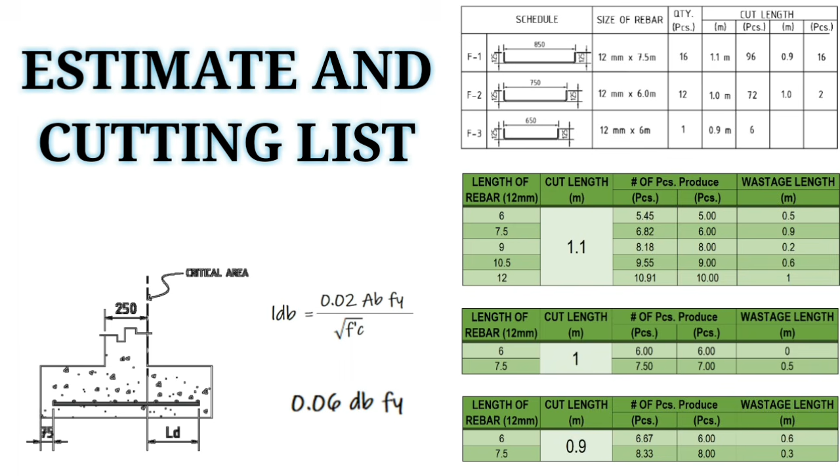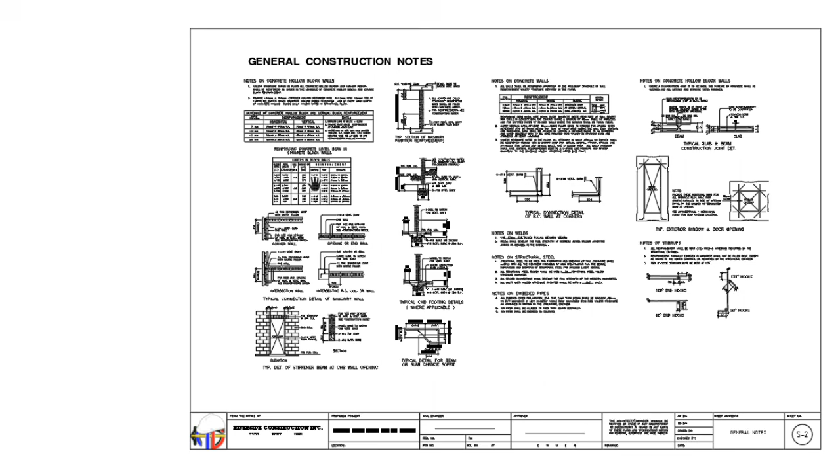Rebar estimate and cutting list is a complicated part of estimate, lalo na kapag hindi natin kabisado yung mga detail and specs about anchorage, lap splice, hooks, development length, and many more. But sa tulong ng general notes na makikita sa first page ng structural plan, napapadali na lamang ito na hindi kailangan kabisaduhin lahat ng laman ng NSCP or ng ACI. Ang kailangan lang natin gawin ay basahin muna yung mga nakalagay sa general notes before starting estimate. Or, if you have time, pwede niya rin balikan yung nauna nating video about development length, seismic hook, and anchorage.

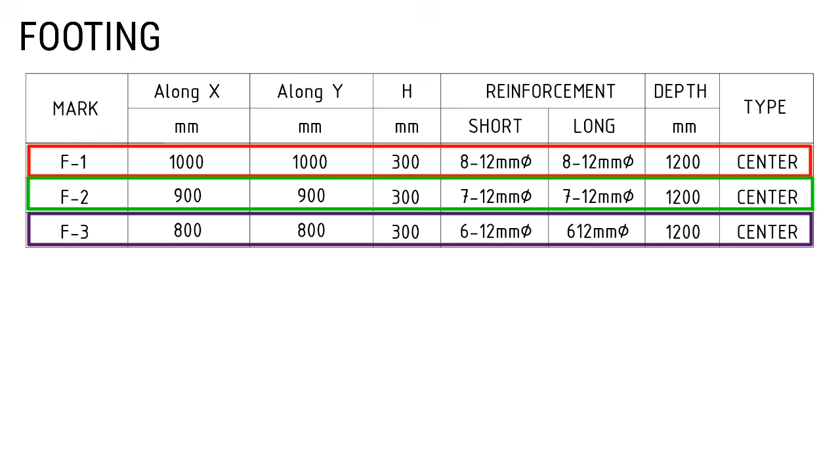Okay, mag-umpisa tayo sa footing. Meron tayong dito yung schedule ng footing. Sabi dito sa schedule, ang F1 ay may 8 pieces na 12 mm in diameter both ways. F2, 7 pieces na 12 mm in diameter. At yung F3, meron daw itong laman na 6 pieces na 12 mm in diameter both ways. Base dito sa plano, meron tayong 6 sets of F1, 5 sets of F2, at 2 sets of F3.

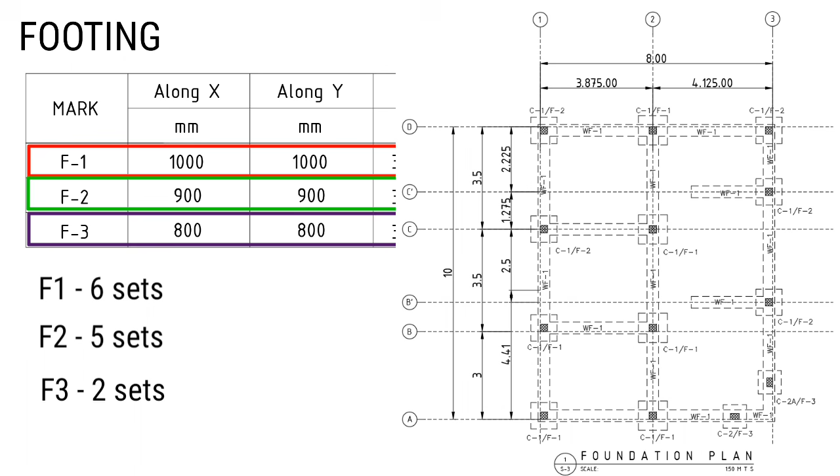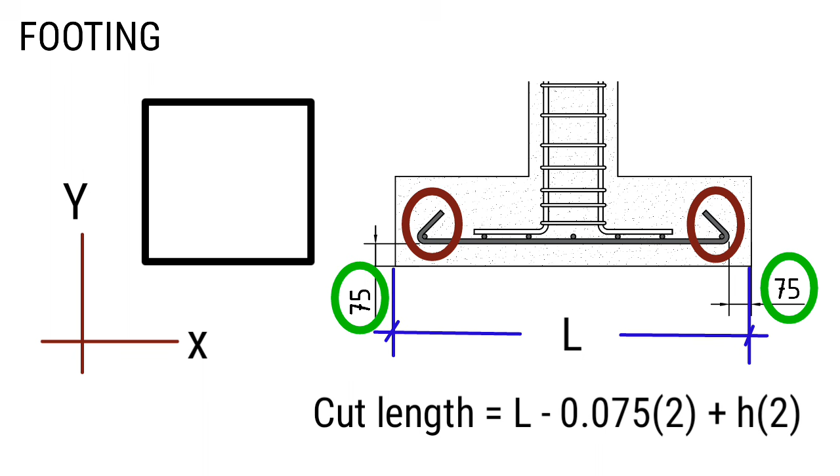After natin malaman yung detail ng ating footing, alamin naman natin yung sukat o haba ng bakal na magagamit natin each footing. Since square ang ating footing, anuman ang makompute natin na haba ng bakal along X, ganun din ang haba along Y direction. Ang haba ng bakal na kailangan natin, that is equal to length ng footing minus concrete cover. So meron tayong 75 mm na concrete cover para sa structure directly contact on ground o sa lupa, plus length of hook. But the question is, kailan ba natin maglagay ng hook?

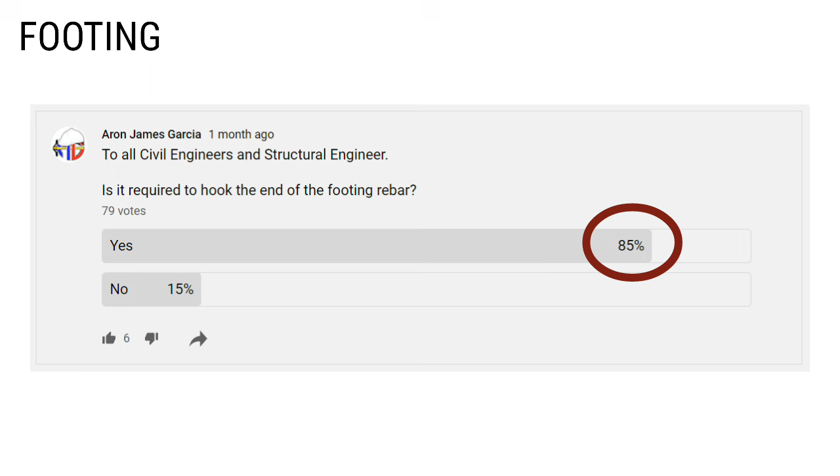Base dito sa ginawa kong pulse survey, majority ang sagot ay kailangan daw maglagay ng hook. So meron ditong sumagot sa ating katanungan. Basahin natin ito. Ito ay sagot ni Sir George na kaisa-isang nagkomento. Shout out pala Sir George. Salamat sa pagsagot ng aming katanungan.

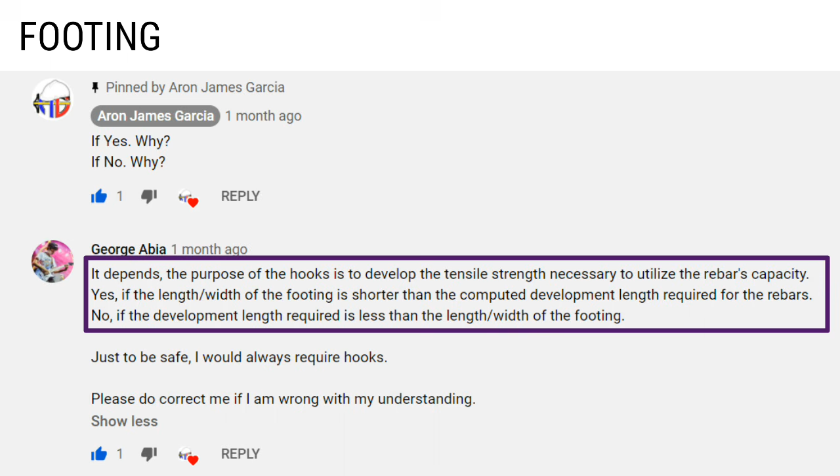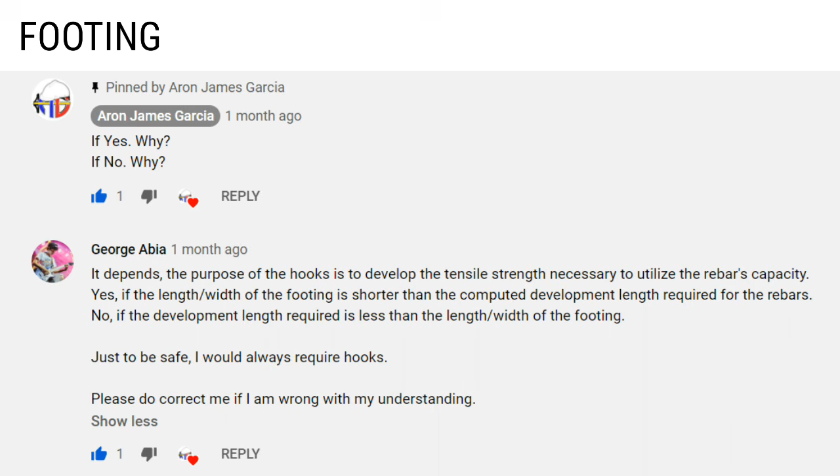Sabi niya dito, it depends. The purpose of hook is to develop the tensile strength necessary to utilize the rebar capacity. At ang sabi niya dito, oo daw, kailangan daw maglagay ng hook if the length or width of the footing is shorter than the computed development length required for the rebars. Hindi daw kailangan maglagay ng hook if the development length required is less than the length or width of the footing. Which is tama. At ang sabi pa niya dito, just to be safe, I would always require hooks.

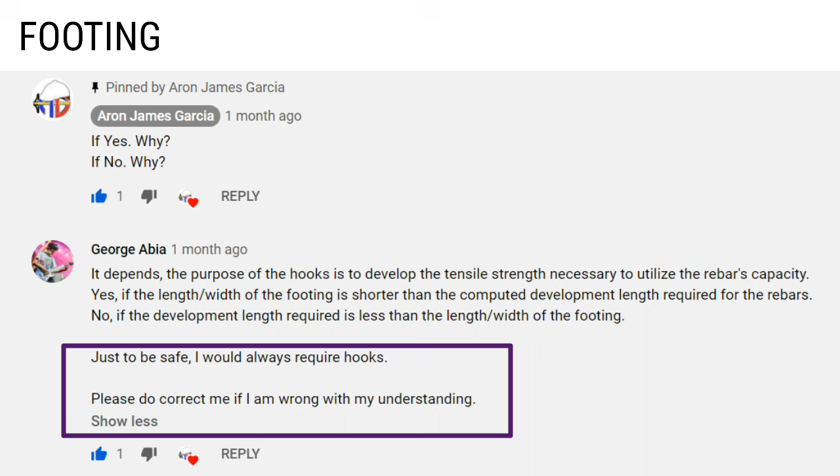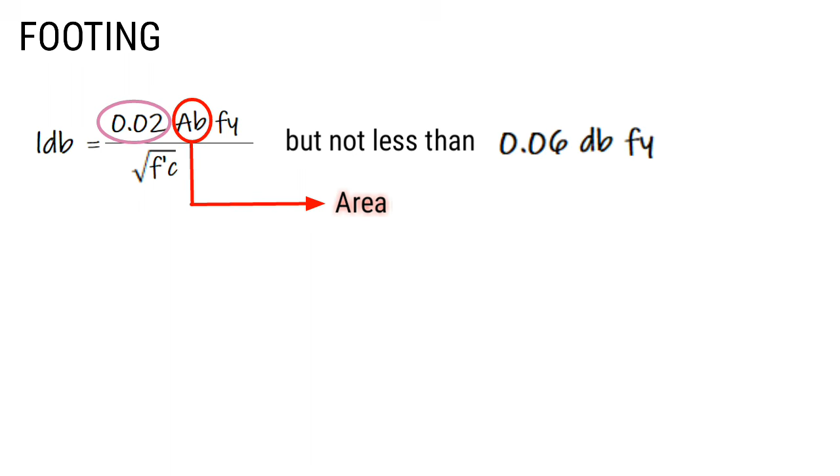So, subukan natin i-translate ito into numbers, itong komento ni Sir George. Ito yung tinutukoy ni Sir George na required development length sa kanyang sagot. Development length, that is equal to 0.02 multiply by the area ng steel na gagamitin, multiply by the bar grade ng ating bakal or yung tinatawag natin na yield strength.

Divided by the square root of FC prime or yung compressive strength ng concrete, but not less than 0.06 multiply by bar diameter multiply by the yield strength ng steel. By the way, gagamit tayo ng grade 40 na bakal para dito sa ating footing, with a yield strength of 275 megapascal. At yung compressive strength naman natin, gagamit tayo ng 3,000 PSI or 20.7 megapascal.

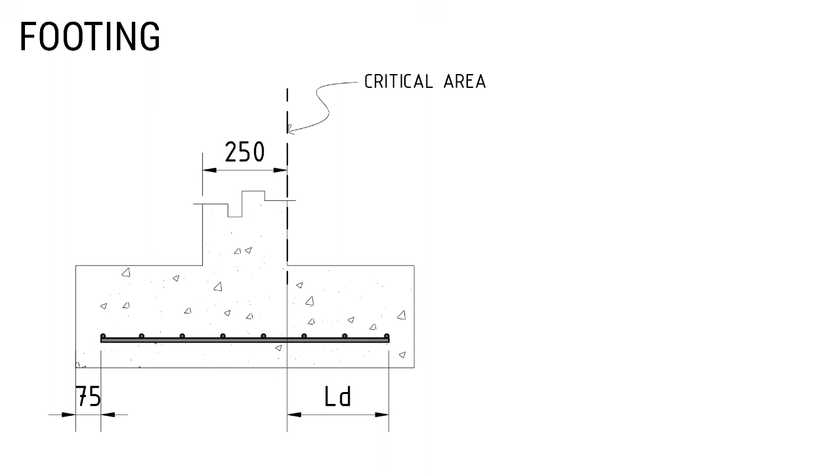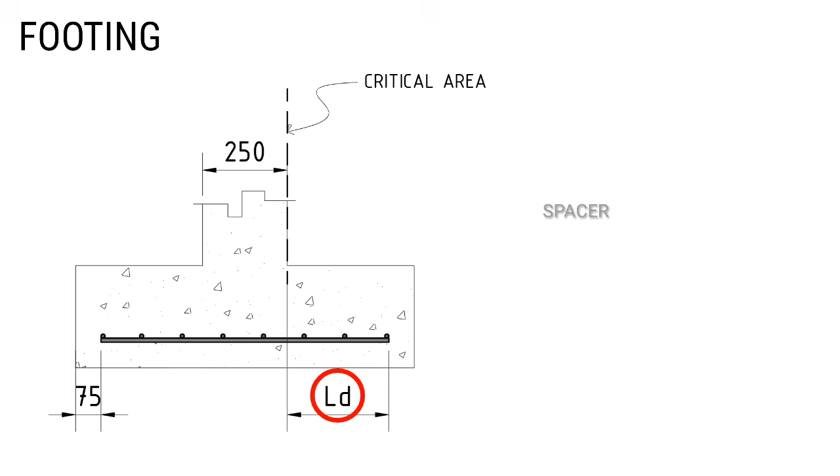So yung length or width of footing na tinutukoy ni Sir George ay ito yun. Ito yung actual development length or furnished development length ng ating footing. Kaya sa mga nakakakita ng footing reinforcement na walang hook, hindi natin pwedeng sabihin na mali yung paglalagay ng bakal without a basis or a data. At sa mga nagsasabi naman na ang purpose ng hook ng footing ay para magsilbing spacer, mali po ito.

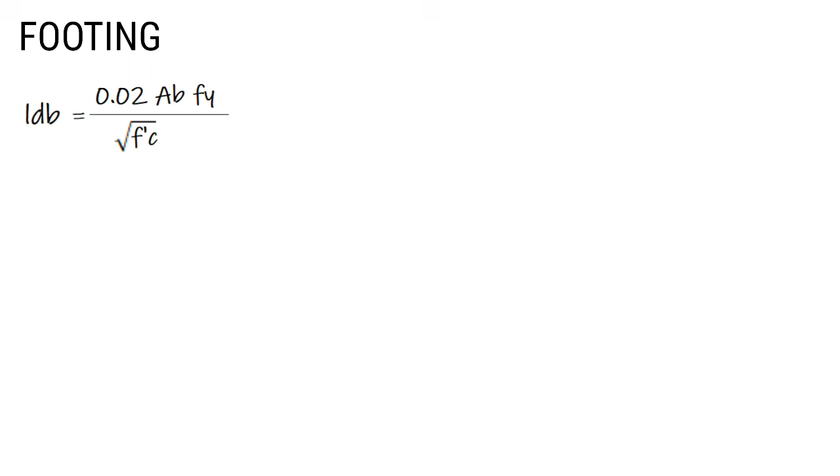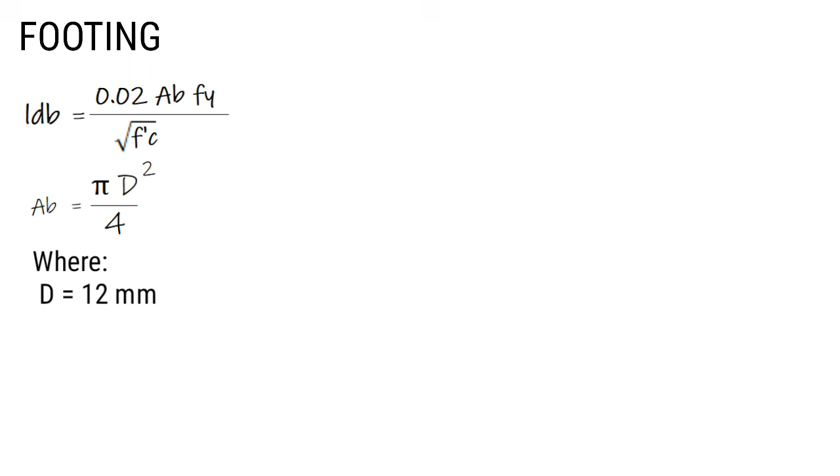Okay, let's find out kung kailangan ba natin maglagay ng hook. So, required development length, that is equal to 0.02 multiply by the area ng steel, which is pi d square divided by 4, where d, that is equal to 12, multiply by the yield strength ng steel, which is 275 megapascal, divided by the square root of FC prime, or 20.7 megapascal.

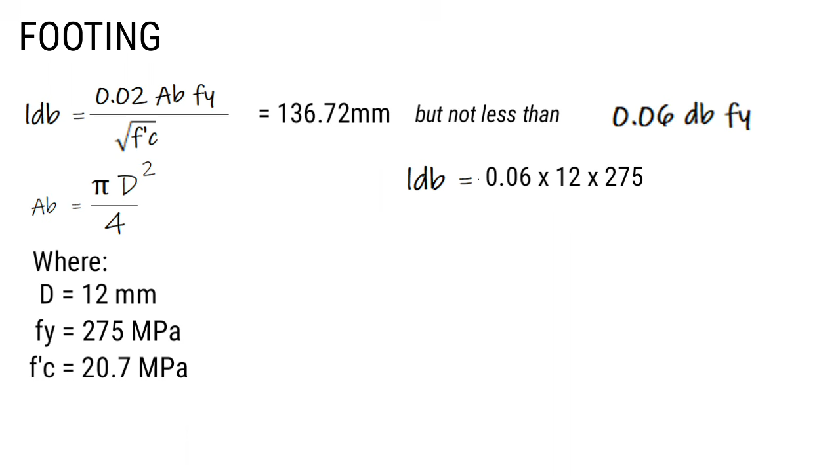So, ang makukuha natin, that is equal to 136.72 millimeters. Pero, dapat hindi daw ito bababa sa 0.06 multiply by the bar diameter multiply by 275 or yung yield strength. So 0.06 multiply by 12 millimeters multiply by 275 na Fy, that is equal to 198 millimeters. So, ang governing value ng ating LD or yung required development length natin ay 198 millimeters.

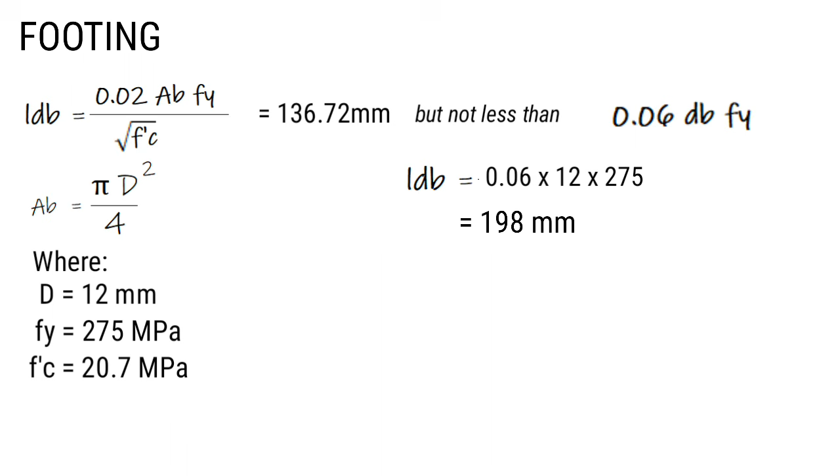Other than 12 millimeters, so meron akong ginawang table dito. From 10 millimeters to 32 millimeters in diameter na bakal. Pwede nyo itong gamitin as long as pareho ng requirement na nasa table. Compressive strength nito ay 20.7 megapascal with corresponding bar grades. Kung mas mataas yung requirement nyo dito, gamitin nyo na lang yung ating formula.

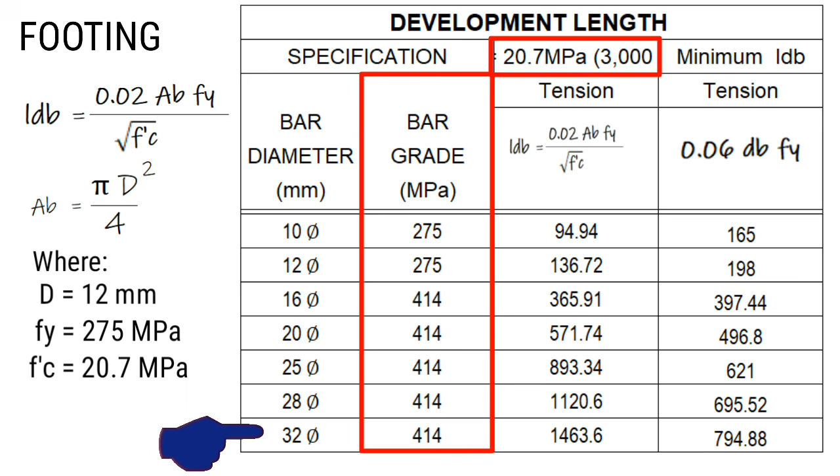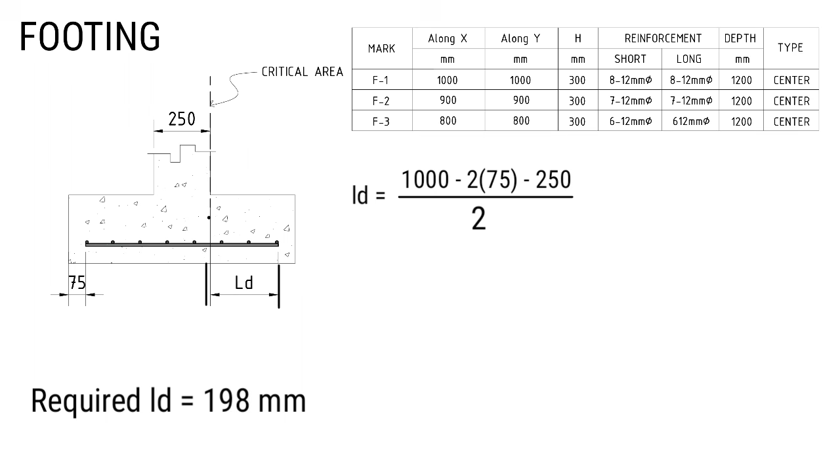Okay, let's compute the furnish LD or furnish development length ng footing 1, footing 2, at footing 3. So let's start with F1 or footing 1. So LD or furnish LD, that is equal to 1,000 or 1 meter na dimension ng ating footing. Ibabawas lang natin yung concrete cover na 75 both side, so minus 75, minus 75. At ibabawas din natin yung sukat ng ating column, which is 250 millimeters, so minus 250 millimeters divided by 2 para makuha natin itong from critical area mula do sa dulo ng ating bakal.

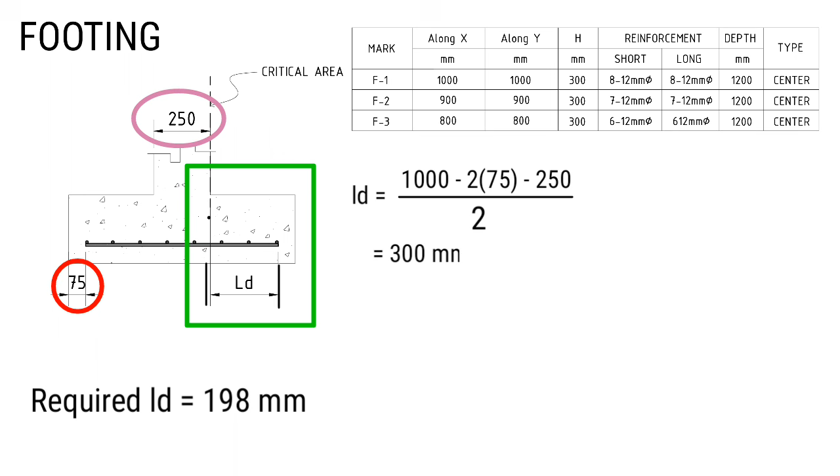That is equal to 300 millimeters. 300 millimeters is greater than the required development length natin na 198. Therefore, hindi natin kailangan maglagay ng hook para sa ating F1.

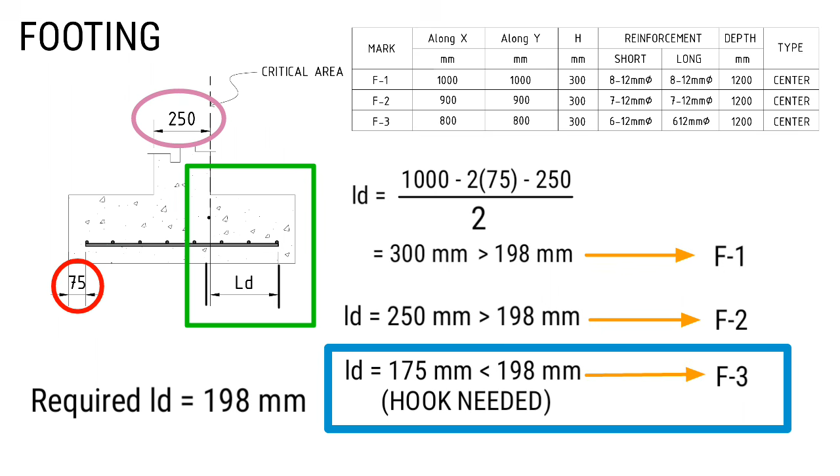Since meron tayong computed na required LD na 198 at meron tayong furnished LD na 175, ibig sabihin kung ano yung kulang doon sa 175 para maging 198, yun ang ibebend natin or yung haba ng hook. So 198, ibabawas lang natin yung 175, that is equal to 23 millimeters.

So 23 millimeters ay napakahirap i-bend dahil sa liit ng moment arm nito. So instead of 23, ang ginawa ko, hinabaan ko na siya, at least 9 db. So yung iba, ginagawa nila 16 db or 16 multiplied by bar diameter. Okay din naman ito as long as mas mahaba ito sa required LD natin. So 9 db or 9 multiplied by 12 na rebar diameter natin, that is equal to 108 millimeters.

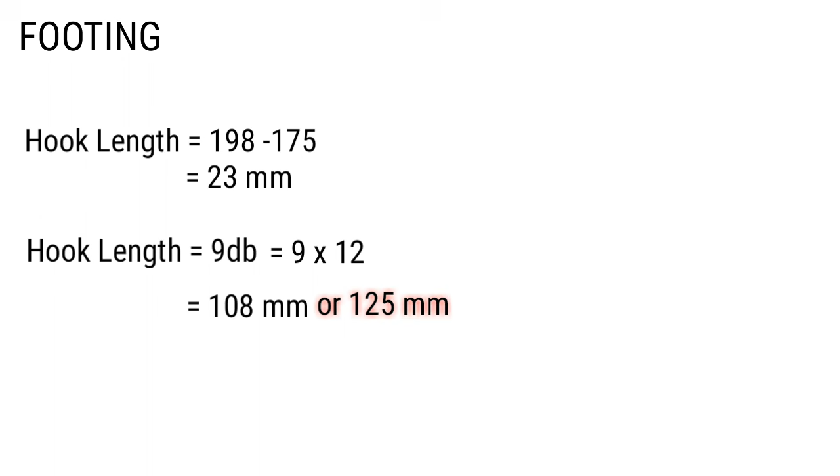Pero dapat divisible by 25 millimeters ang ating sukat para hindi na mahirapan pa yung tao na magsusukat. Kaya gawin natin itong 125 millimeters. Para sa bend nito, pwede nyo i-bend ito into 90 degrees or 135 degrees kung hindi kasya sa height ng footing. Okay, balik tayo sa ating topic na estimate.

So unahin muna natin alamin yung haba ng bakal na kakailanganin natin. Let's start with footing 1. By the way, para maging uniform yung ating rebar reinforcement sa footing 3, so maglalagay na rin tayo ng 125 mm na hook sa F1 and F2 or footing 2.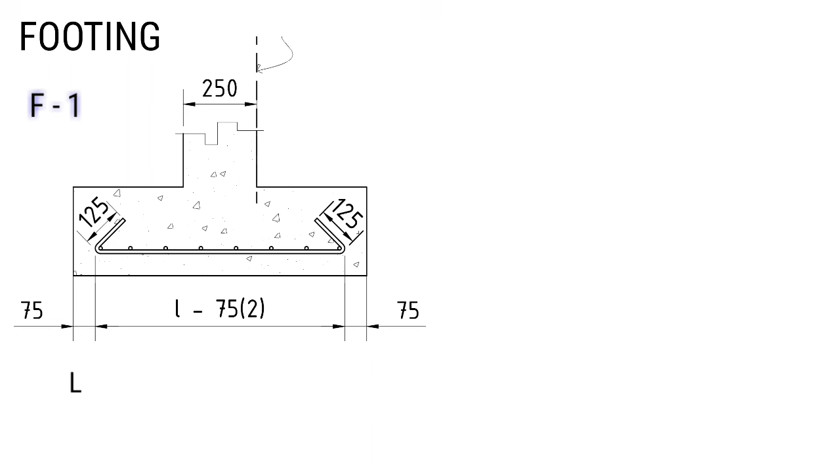So length of rebar, that is equal to 1 meter. Ibabawas lang natin yung concrete cover na 0.075 kabilaan, so multiply by 2, plus yung ating hook. So 0.125 multiplied by 2. And that is equal to 1.1 meter.

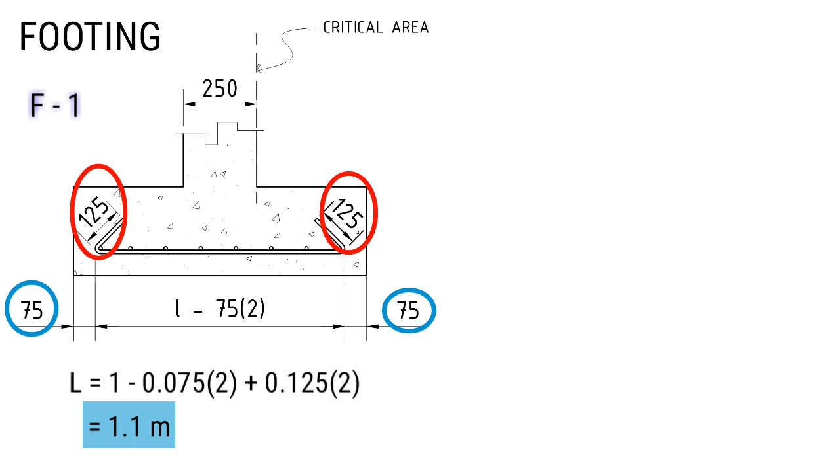So we have 6 sets of footing 1 na kung saan kada isang set nito ay naglalaman ng 8 pieces na 12 mm both ways. So number of pieces, that is equal to 6 sets multiplied by 8 pieces na 12 mm multiplied by 2 dahil both ways ito, that is equal to 96 pieces. So kailangan natin ng 96 pieces na bakal na may habang 1.1 meter.

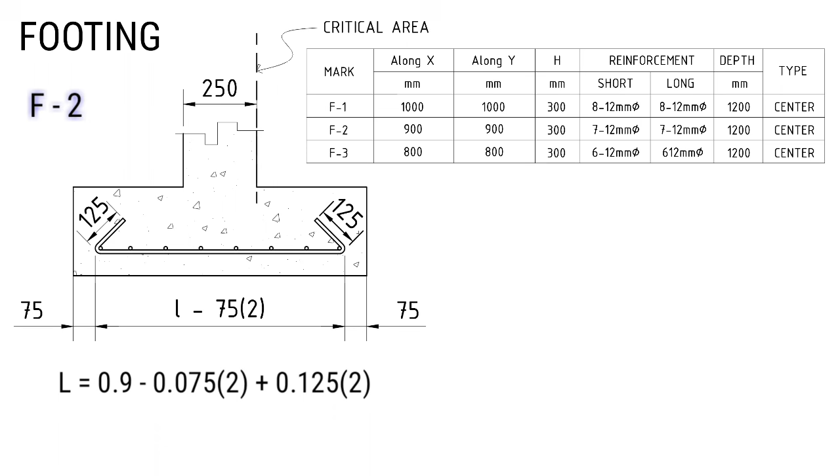Next, footing 2. So length of rebar, that is equal to 0.9 meter. Ibabawas lang natin yung concrete cover, so minus 0.075 multiplied by 2, plus yung hook length natin na 0.125 multiplied by 2. And that is equal to 1 meter.

So we have 5 sets of footing 2 na kung saan kada isang set nito ay may laman na 7 pieces na 12 mm both ways. So number of pieces, that is equal to 5 sets multiplied by 7 pieces na 12 mm diameter na bakal multiplied by 2 dahil kabilaan ito. And that is equal to 70 pieces. So kailangan natin ng 70 pieces na bakal na may habang 1 meter.

Next, footing 3. So length of rebar, that is equal to 0.8 meter minus 0.075 multiplied by 2 na concrete cover natin plus 0.125 multiplied by 2 na hook length, and that is equal to 0.9 meter. So we have two sets of footing 3 na kung saan kada isang set nito ay naglalaman ng 6 pieces na 12 mm in diameter na bakal both ways. So number of pieces, that is equal to 2 multiplied by 6 pieces multiplied by 2 dahil both ways ito, and that is equal to 24 pieces. So kailangan natin ng 24 pieces na bakal na may haba na 0.9 meter.

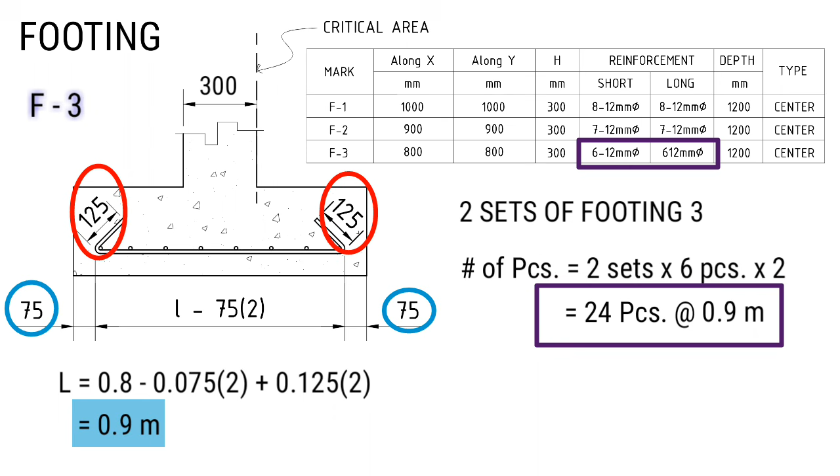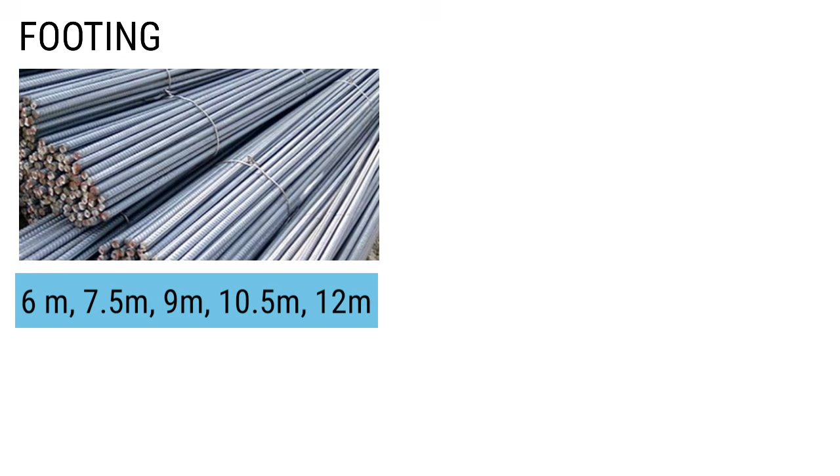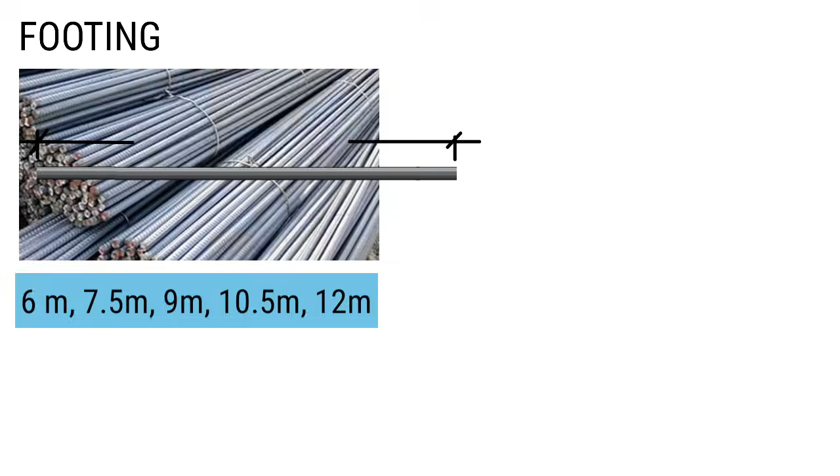Ang tanong, saan natin kukunin or anong haba ng bakal ang puputulin natin para maiwasan natin ang wastage? So dito sa Pilipinas, meron tayong 6 meters, 7.5 meters, 9 meters, up to 12 meters na haba ng bakal. So ang gawin natin, i-divide lang natin ito sa haba ng bakal na kailangan natin. Okay, let's start with footing 1. So umpisa natin sa 6 meters. So 6 divided by 1.1 na haba ng bakal na kailangan natin.

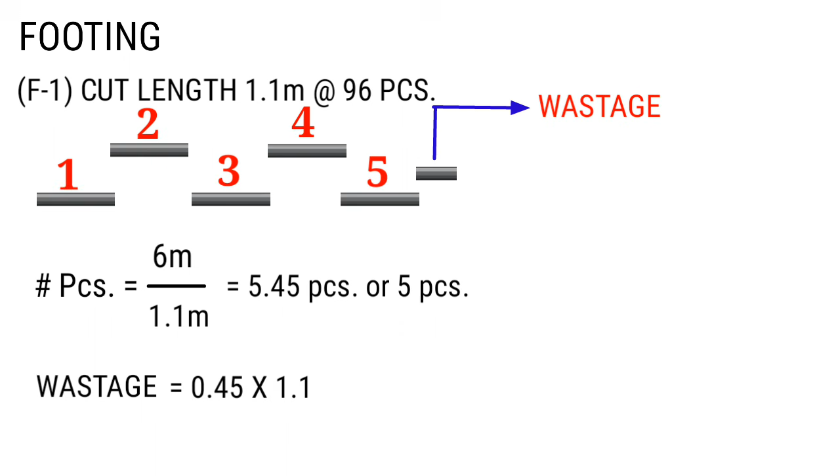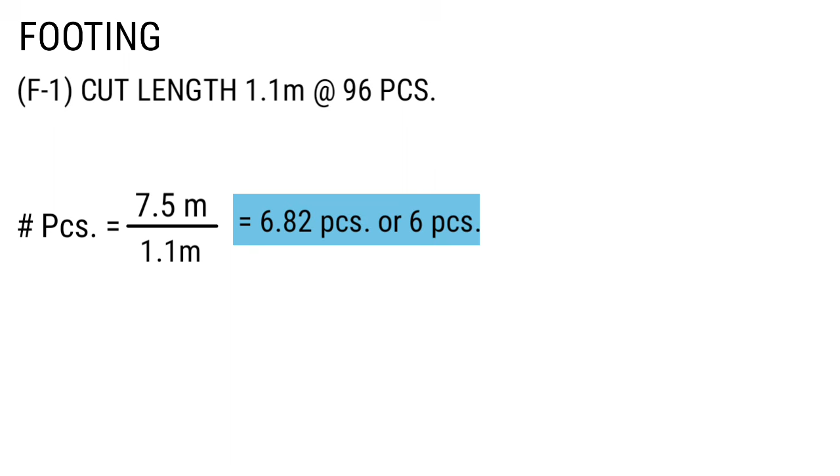That is equal to 5.45 pieces or 5 pieces. So meron tayong wastage o masasayang na bakal na may haba na 0.45 multiplied by 1.1, and that is equal to 0.5 meter. For 7.5 naman, so 7.5 divided by 1.1, and that is equal to 6.82 or 6 pieces. So ang wastage natin dito ay 0.82 multiplied by 1.1, and that is equal to 0.9 meter.

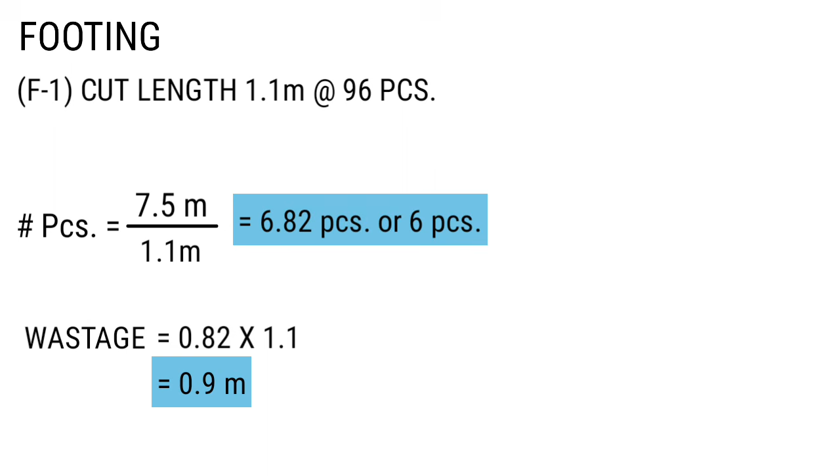So same process din ang gagawin natin sa 9 meter, 10.5 meters at 12 meters. So ito yung summary. Kung mapapansin nyo, ang 9 meters ay may kaunting tapon o mas maiksi ang masasayang na bakal. But considering the 7.5 meters and 12 meters na maaari natin magamit yung wastage nito sa footing 2 at footing 3. So hindi laging mas maiksi ay may kaunting wastage. Pwede rin sa mahaba. Pero kung gumagawa tayo ng estimate for big projects, pwede nyong gamitin yung 9 meters para magkaroon tayo ng factor of safety in case tumaas yung price ng bakal.

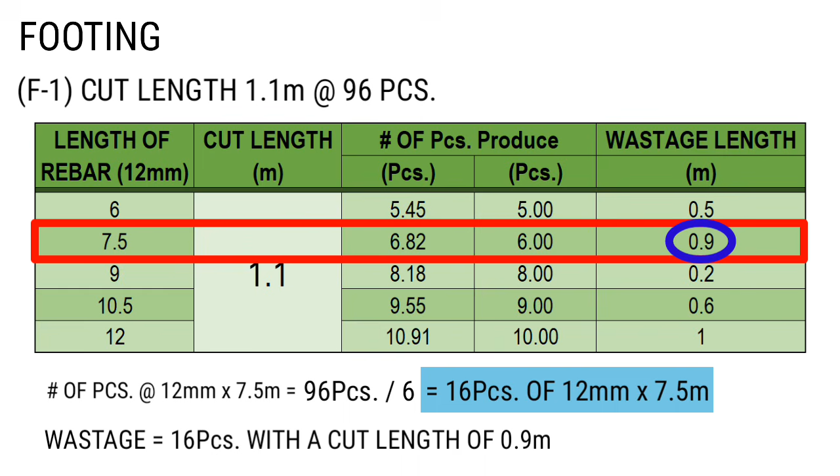Pero dahil ang available lamang na bakal na mabibili sa maliliit na hardware or commercially available ay 6 meters at 7.5 meters. Dahil ang 9 meters to 12 meters ay made to order or pinupurchase ito directly sa manufacturer. So gagamit tayo ng 7.5 meters para sa footing 1. Pero in case wala tayong paggagamitan na 0.9 meter na wastage ng 7.5, 6 meters ang gamitin natin na may kaunting wastage. So number of pieces of 12 mm by 7.5 meters, that is equal to 96 pieces divided by 6. So ang makukuha natin, 16 pieces na 12 mm by 7.5. So meron itong wastage na 16 pieces na 0.9 meter ang haba na pwede natin magamit sa footing 3.

Next, footing 2. So here's the result. So ang best choice natin dito between 6 and 7.5 ay yung 6 meters. So number of pieces at 12 mm by 6 meters, that is equal to 70 pieces divided by 6. And that is equal to 11.66 pieces or 12 pieces na 12 mm by 6 meter. So meron itong wastage na 2 pieces na may habang 1 meter.

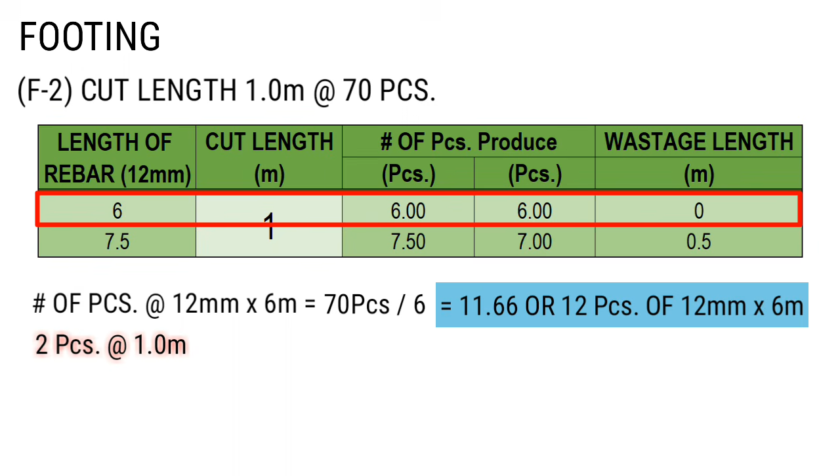So paano nakuha yung 2 pieces na yan? So wastage, that is equal to 1 minus 0.66 multiplied by 6 na ginamit natin na bakal. And that is equal to 2.04 pieces or 2 pieces.

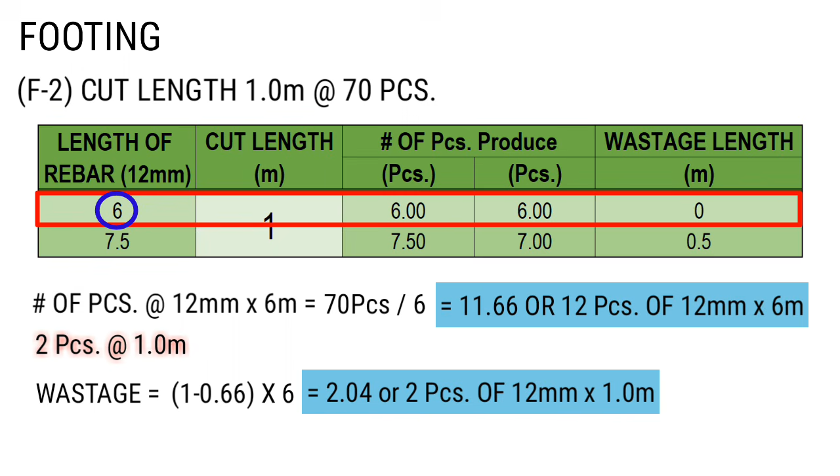So meron tayong total of 24 pieces na 0.9 meter ang haba. Pero dahil meron tayong mga wastage na kasukat ng bakal na kailangan natin para dito, so ibabawas natin ito sa 24 pieces. So remaining, that is equal to 24, ibabawas natin yung 16 pieces na wastage dun sa F1, which is 0.9 meter ang haba. So pasok siya dun sa ating requirement.

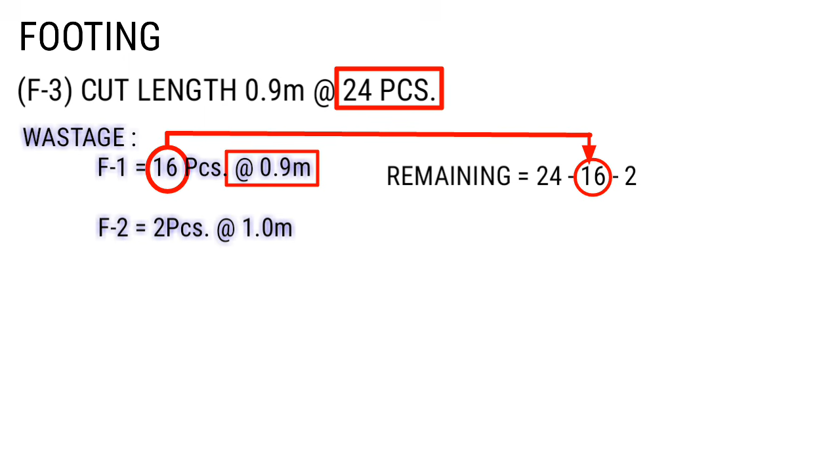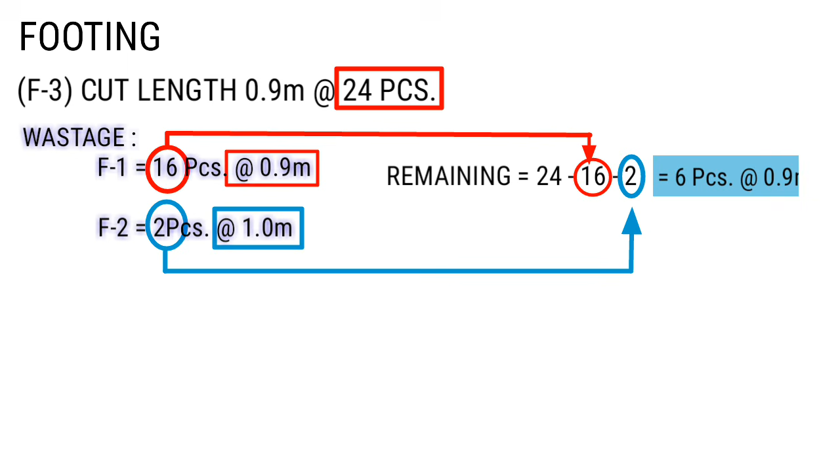At ibabawas na rin natin yung 2 piraso na 1 meter ang haba na makukuha natin dun sa footing 2. So that is equal to 6 pieces na 0.9 meter ang remaining natin. Sa 6 meters, makakakuha tayo ng 6 na piraso na 0.9 meter ang haba. Sa 7.5 naman, makakakuha tayo ng 8 pirasong 0.9 meter ang haba. Pero dahil 6 na lamang ang kailangan natin na 0.9 meter ang haba, kaya ang pipiliin natin ay yung 6 meters. So kailangan pa natin ng isang pirasong 12 mm by 6 meters para sa footing 3.

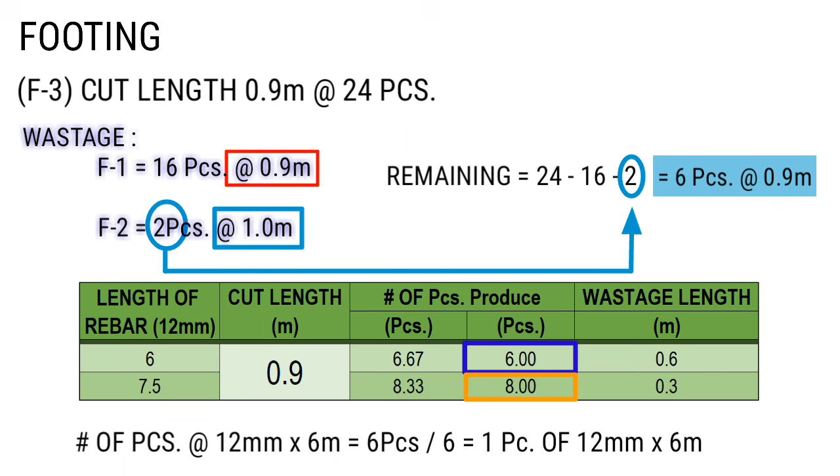Kung gagawa tayo ng contract or BOQ, in kilogram dapat siya. Pero sa cutting list, in terms of pieces. So unahin natin si BOQ. First, alamin muna natin yung weight ng ating rebar na gagamitin sa ating footing.

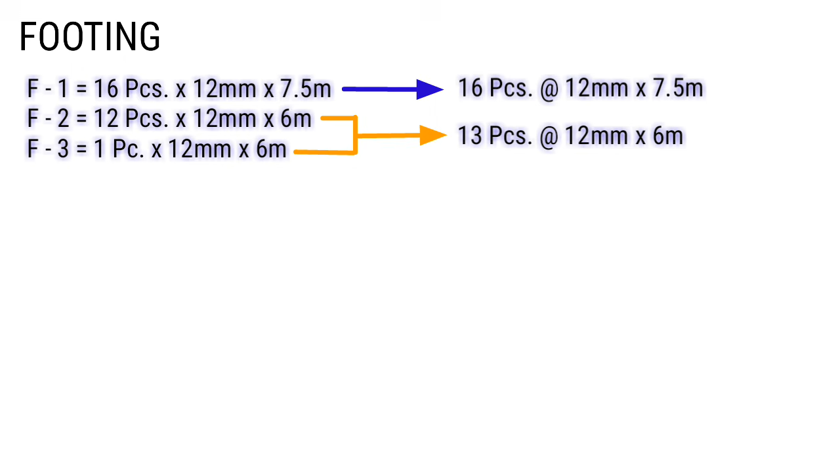So we have 13 pieces na 12 mm by 6 meters na bakal. At meron din tayong 16 pieces na 12 mm by 7.5. So here's the constant weight ng ating bakal per meter length. So unahin natin yung 13 pieces na 12 by 6 meters. So weight of 13 pieces na ating bakal, that is equal to 13 pieces multiply by 0.888 na constant value natin per meter length ng 12 millimeters multiply by 6 meters, and that is equal to 69.26 kg.

Isunod naman natin yung 16 pieces. Weight of 16 pieces na bakal, that is equal to 16 pieces multiply by 0.888 multiply by 7.5 na haba ng ating bakal, and that is equal to 106.56 kg. So in total, meron tayong 175.8 kilograms.

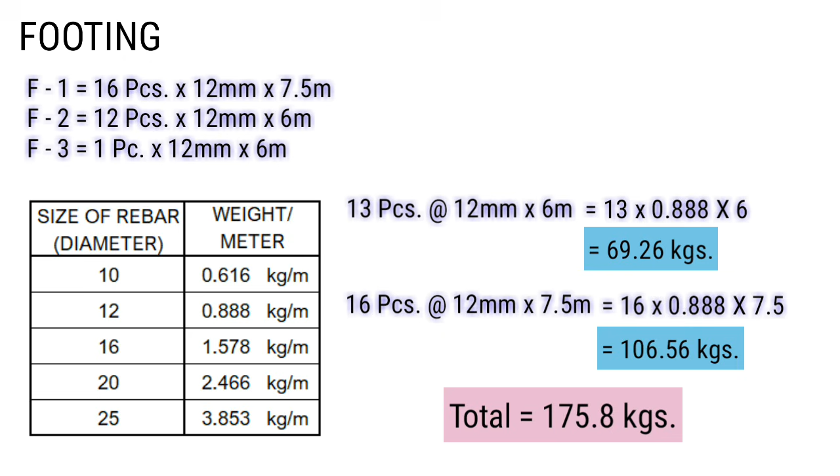So ito naman yung summary ng ating cutting list na na-compute natin kanina. Meron tayong ditong schedule, size of rebar, bilang ng bakal at yung cut length. So all in all, we need to order 13 pieces of 12 mm by 6 meters, 16 pieces of 12 mm by 7.5 meters. So ganun lang kasimple mag-estimate ng bakal para sa footing.

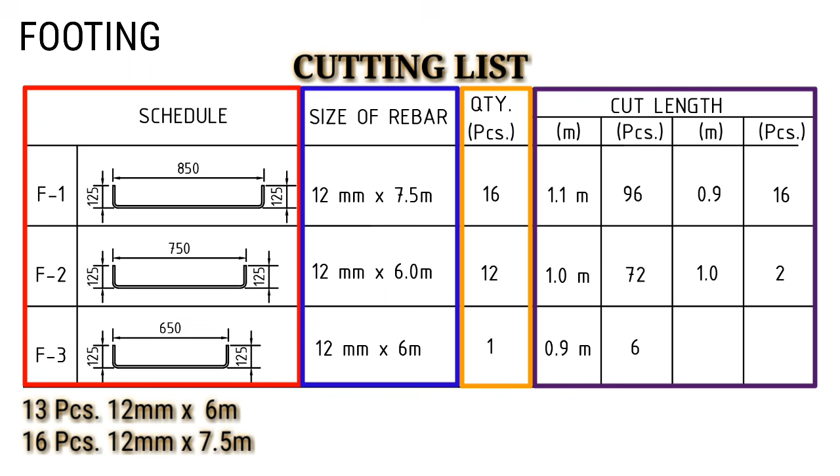So sa susunod nating upload, pag-usapan naman natin kung paano mag-estimate ng bakal para sa wall footing, column, and slab on grade.